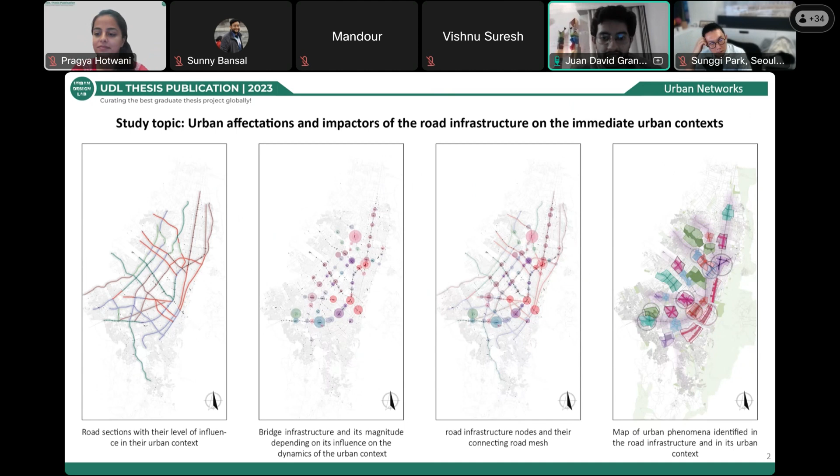But what is the degree of influence that this road infrastructure has had on the urban centers? How has the insertion of these bridges caused different types of changes in the morphology, fragmenting and disconnecting the urban system of Bogotá? For this reason, the object of study concentrates on the typologies of bridges and road sections.

of Bogotá's road network, analyzing the magnitude of these elements and how they trace and define urban relations in sectors where their presence generates social, economic, and environmental barriers on urban centers, causing an infrastructure that is designed to connect the city at the largest scale to become segregated and fragmented elements of urban dynamics within the context of the road network.

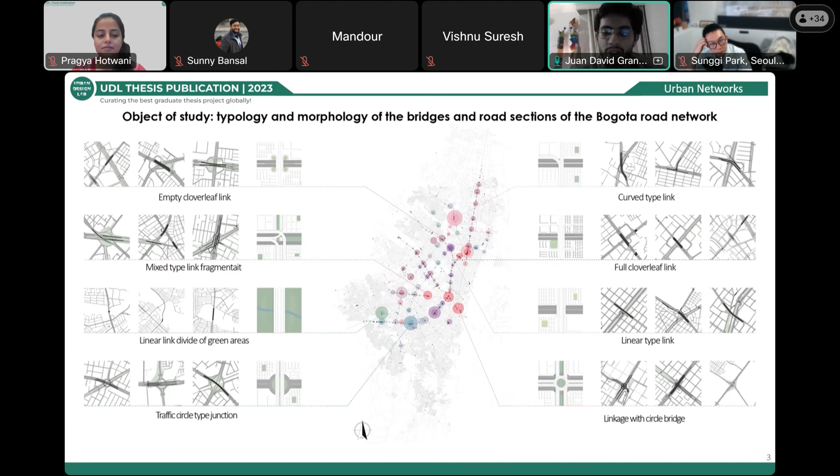The identification of the areas affected by the expansion of the city road network has shown how, at the metropolitan level, Bogotá's urban system, composed of urban, economic, cultural, social, and environmental networks, has been fragmented and isolated by the insertion of mobility infrastructure, creating points of deterioration and forgotten areas that, through the obsolescence of bridges, have made the urban landscape hostile to the pedestrian.

The methodology of this work consists of designing a diagnostic matrix of urban phenomena that occur in urban centers caused by the impacts and affectations resulting from the expansion of mobility infrastructure in Bogotá. This matrix seeks to identify the typology of road elements that affect urban dynamics and how they create impacts in the social and environmental dynamics of the urban center close to them.

Six urban phenomena diagnoses in the analysis of the road network of Bogotá are highlighted, such as isolation, segregation, bordering, dispersion, fragmentation, and urban repulsion, all characterized by different ways of behaving with the affected territory.

For this presentation, two urban phenomena cases were chosen to deepen the diagnostic and design methodology generated in each. One of the urban phenomena studied is the urban isolator, which consists of a node or structure that diminishes adjacent dynamics through elements such as bridges and road sections that disconnect and dissociate social dynamics, producing deterioration and inactivity in the urban context.

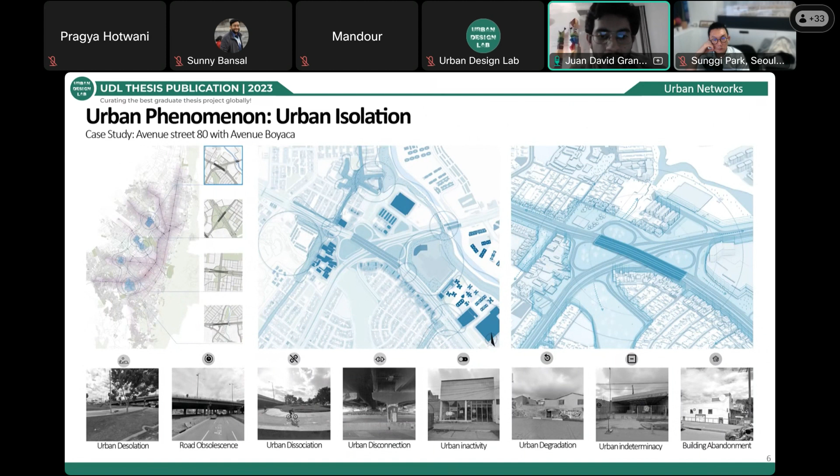The second urban phenomenon studied consists of a linear infrastructure that generates internal urban borders in the city, fragmenting various morphologies and typologies among neighborhoods, causing spatial segregation of the population and hindering accessibility, thus creating hostile areas and residual spaces. For this phenomenon, the construction and expansion of the road infrastructure of Calle Sexta with the NQS highway was chosen.

This has the particularity of having a massive bridge that generates a visual and spatial barrier for pedestrians, which, along with wide road sections and non-existing crosswalks, has caused an impermeable edge that deteriorates each side of the road.

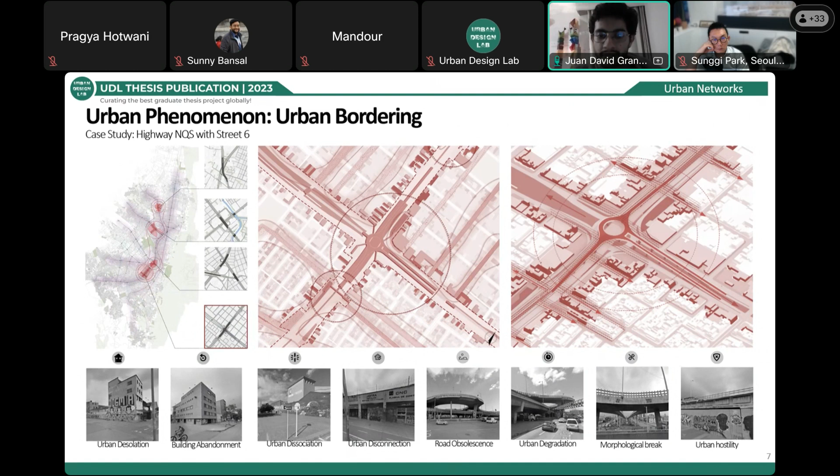This leads to abandonment of commercial and residential buildings, as well as squares and paths that don't offer adequate space for the development of urban activities, causing unsafe areas for pedestrian mobility.

Considering these situations for each of the six cases studied, a matrix of strategies and possible scenarios for the urban activation of Bogotá is proposed.

Each one poses a question about a possible scenario that could be presented as a modification or change of the urban landscape conception, affected by a new habitable structure that hybridizes with the urban context, generating other ways of inhabiting spaces designed for cars that will now be designed for citizens.

Therefore, different objectives and forms of action related to the space identified within the typology of bridges and road sections are proposed. By this matrix of strategies and objectives, a catalog of habitable structures is made up of different urban and architectural modular pieces that respond to different urban situations, identifying the elements that make up the mobility infrastructure. Different types of urban pieces are generated that seek to reactivate the urban system of the city by converting mobility into a habitable space.

These are 5 strategies. The first 2 are located at the first level of the city, where they seek to develop restoration spaces under the bridges and renovation areas in the urban voids around them. The other 2 strategies seek to improve accessibility to the pedestrian bridges and connecting spaces through pieces with a variety of uses and urban activities.

Finally, a strategy that seeks to create a space of permanence of urban dynamics that prioritizes the habitability of these spaces at different times of the day, conceiving mobility not only as a place of passage but also as a space for the creation of urban dynamics.

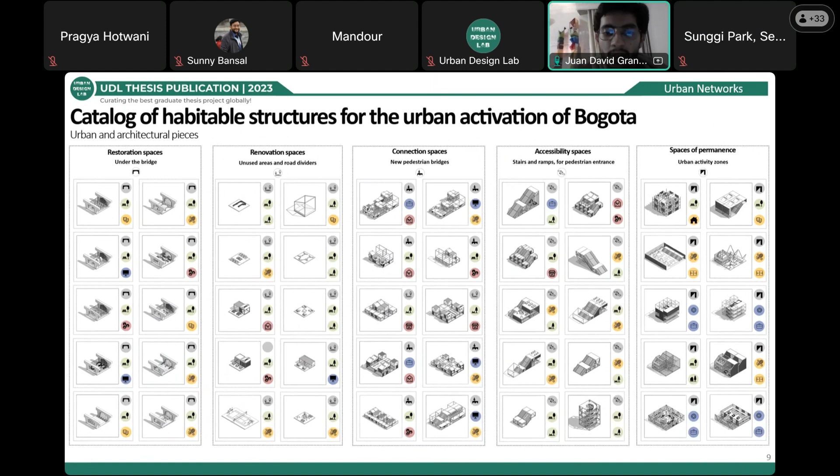What would happen if these isolating structures were urban attraction nodes that connect the dynamics of the sector? These questions speak to a possible scenario that could turn this urban node into a social, economic, cultural, and environmental attractor for the sector that has been isolated.

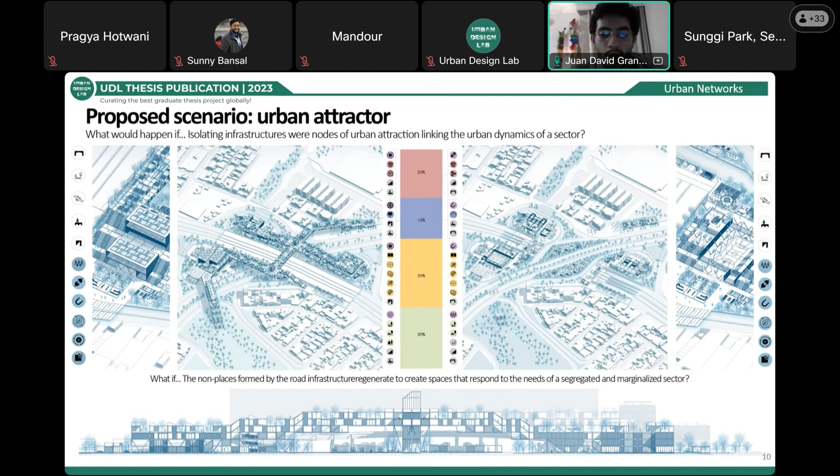These habitable structures seek, through the hybridization of urban pieces, to create attractive spaces for the citizens' direction on the first level, with cultural areas and green areas, as well as the overpass that allows pedestrians to have a different dynamic over the city road network.

The proposed scenario for the case study of the bridges at Avenida Calle 80 and Avenida Boyacá is to create an urban attractor that can be a connection point to enhance the urban activities presented in the sector, becoming a node that, taking advantage of the empty spaces of the road infrastructure, can generate different urban facilities with a variety of uses.

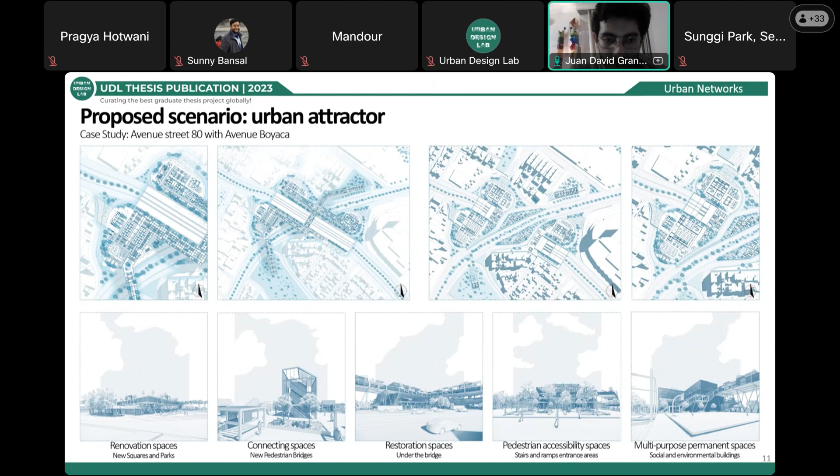Including spaces such as parks, commercial areas, cultural centers, and recreation and leisure areas that integrate the user with this node and its surroundings. What will happen if massive structures become access points and nodes of urban expansion in areas that are indeterminate and dissociated from their context?

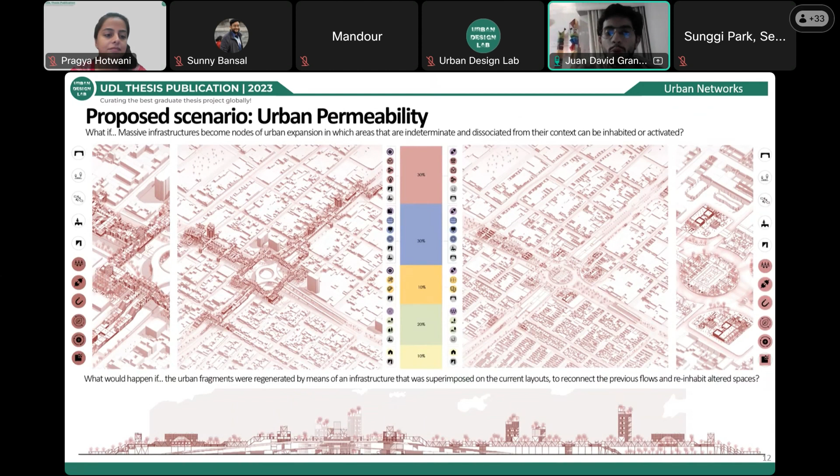This possible scenario seeks that the massive bridge become an axis of permeability that allows, through the hybridization of urban pieces with the surroundings, the creation of a main axis that connects the relationships of these isolated and forgotten neighborhoods by creating new urban activities that enhance the segregated uses of the sector.

In the case study of the NQS highway with Calle Sexta, we seek to overcome the problem of the urban edge by generating a permeable axis between the fragmented neighborhoods, with a habitable structure that becomes a node of urban connections. At the first level, we seek to generate dynamics that support the commercial and productive activities of the sector.

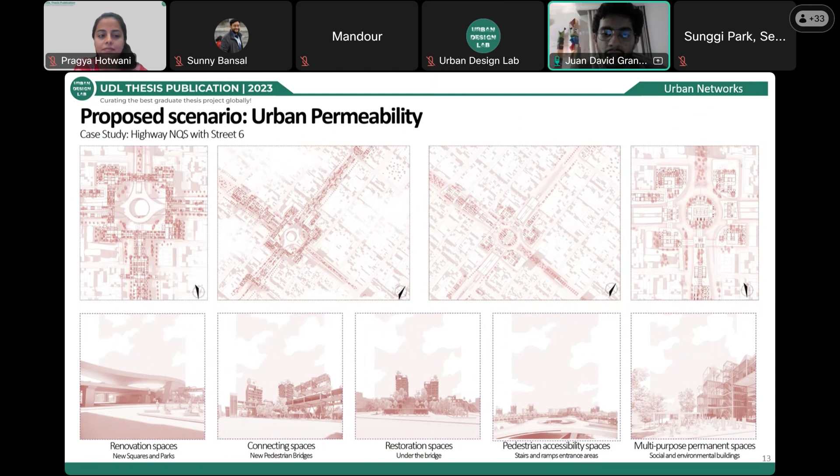Attaching habitable areas to the structure through mixed uses that can be kept active at different times of the day, forming a connecting axis of social interaction between the neighborhoods.

Finally, the objective of the Catalogue of Habitable Structures for urban activation of the mobility infrastructure of Bogotá seeks the creation of different possible scenarios that, through modular pieces with different sizes, spaces, mixed uses, and forms of action, hybridize among them to create complex structures with various modes of habitability for a symbiotic relationship between mobility and urban dynamics.

This changes the concept of mobility infrastructure, where it not only connects the traffic of the city, but also the different important urban systems such as economic, social, cultural, and environmental, among others, through habitable structures that have the versatility to be implemented in each particular situation of each urban center of the city, thus allowing the mobility of the citizen to inhabit it and not be segregated or fragmented.

Thank you very much.

Thank you so much, Juan, for bringing light to these cluttered and fragmented urban systems that you spoke about very relevantly. Thank you, jury, we can go one by one. Professor Park, would you like to start with your comments?

Okay, let me start first. Thank you for the presentation, it was really nice to see. I have a few comments. Taking the idea from obsolete infrastructure, especially bridges in this case, is very smart and it's great to see. Also, showing your strategy with two potential examples is a really good way to prove your idea, so that is very good. My last comment is that the overall visual presentation is very consistent and easy to follow, so it was very nice to see. Congratulations on your graduation.